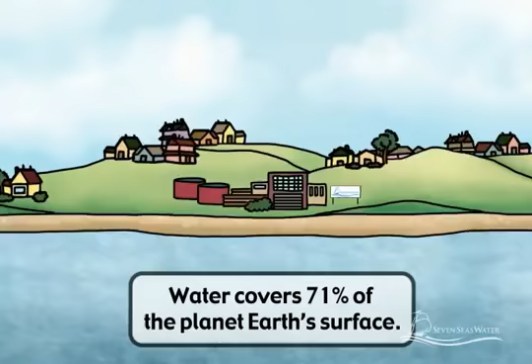As the Earth's population continues to grow and develop, our limited freshwater resources become increasingly scarce. We are fortunate that the Earth's oceans offer an alternative and can provide a sustainable supply of potable water. Seawater can be economically and reliably converted to potable water through a process known as seawater reverse osmosis.

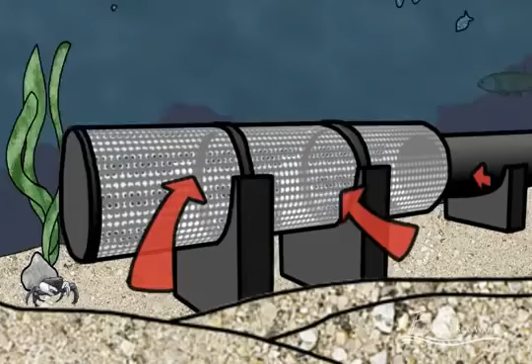The process starts by extracting water from the ocean using wells located on the shoreline or by using an intake structure located in the open ocean.

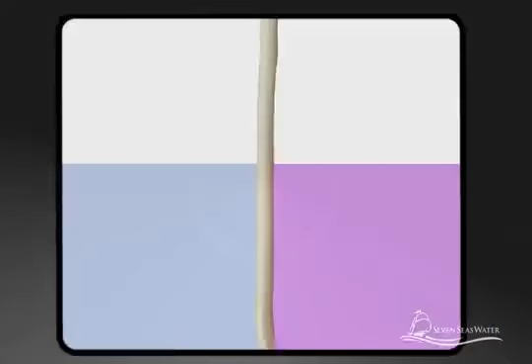Osmosis is a naturally occurring process where a solvent, such as water, passes through a semi-permeable barrier. The membrane allows some things to pass through it, but not others. In nature, the direction of flow through the membrane is from a less concentrated solution, such as fresh water, to a more concentrated solution, such as seawater, until equilibrium is reached.

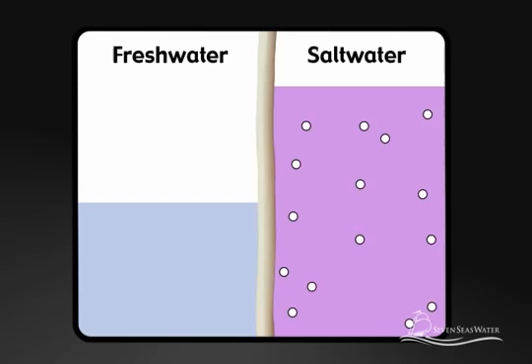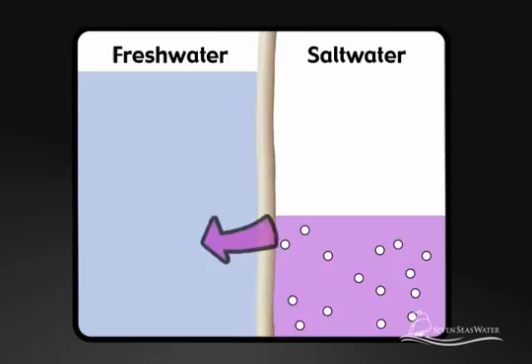Reverse osmosis is when the opposite occurs. By pressurizing the concentrated solution, the seawater, we are able to force water molecules to pass from the salty seawater solution through the membrane to the fresh water.

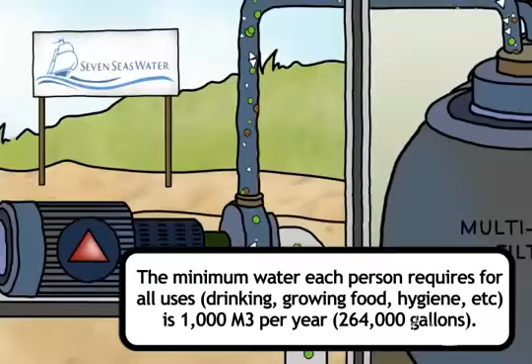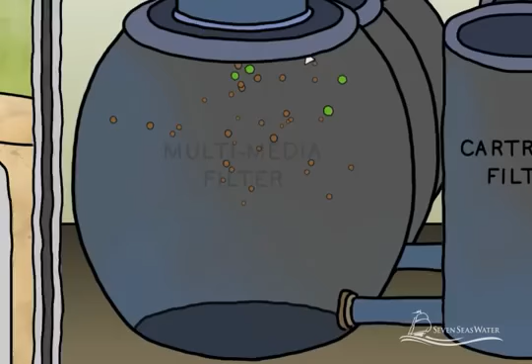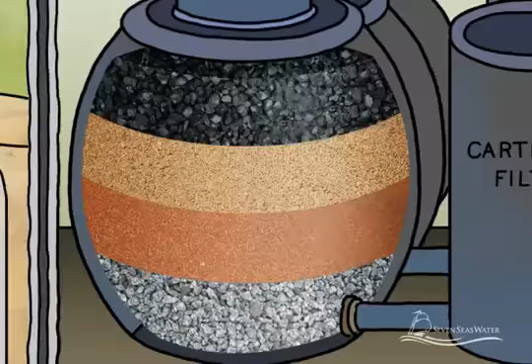To protect the reverse osmosis membranes from becoming clogged by solid particles that can be suspended in the seawater, it is filtered before passing through the membranes. This is accomplished by using multimedia filters, which are tanks or vessels containing a series of layered granular materials. These materials can be anthracite, garnet, sand, pebbles, and/or gravel, assembled in layers. The filters remove sand, twigs, seaweed, and other particles from the seawater.

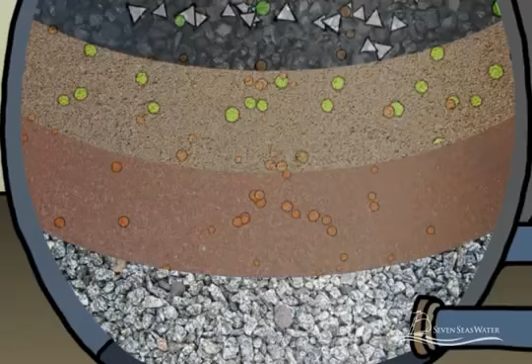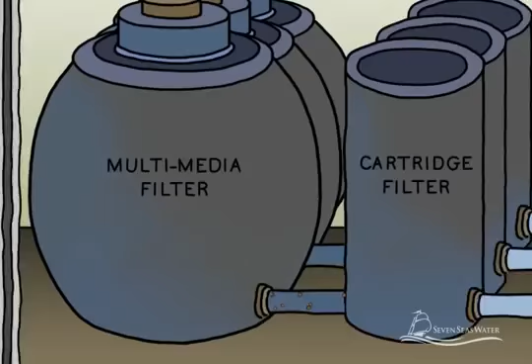In some cases, other types of membranes, known as ultrafiltration and microfiltration membranes, are used instead of multimedia filters to pre-treat the seawater. Next, the filtered seawater travels to the cartridge filters, which act as a second stage of filtration.

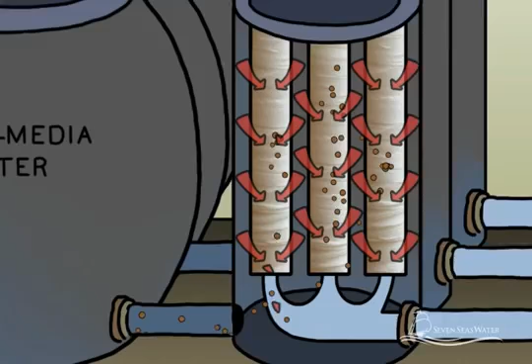Cartridge filters used for seawater reverse osmosis are typically made from a yarn-like synthetic material that is wound into cartridges. These remove even smaller solid particles from the seawater, such as fine sand and clay, before the seawater proceeds to the reverse osmosis membranes.

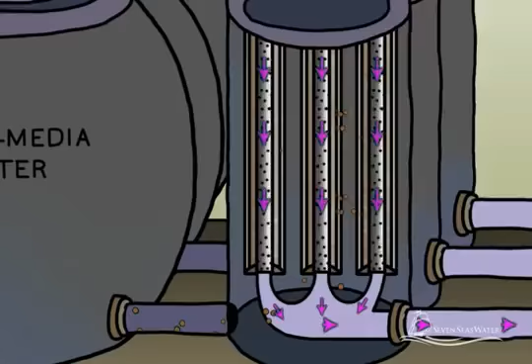High-pressure pumps increase the pressure of the seawater up to 1,000 psi. The pressure needs to be sufficiently high to overcome the naturally occurring osmotic pressure and force water from the saltwater side through the reverse osmosis membranes to the freshwater side.

The salt particles in the seawater are rejected from passing through the membrane to the freshwater side and remain behind on the concentrated saltwater side.

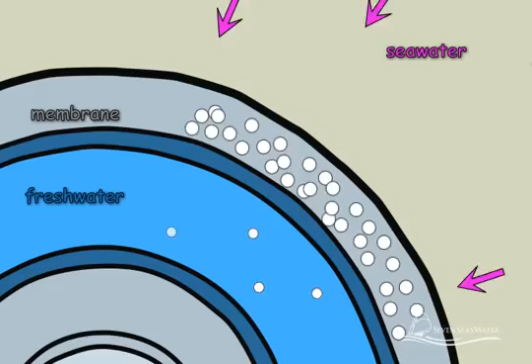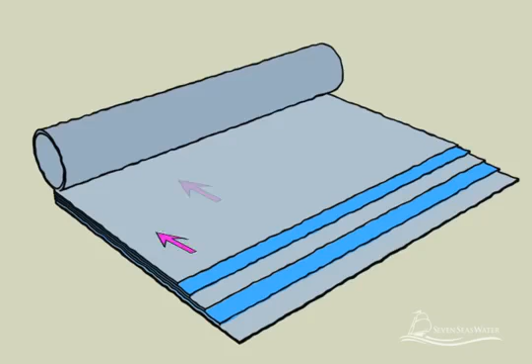The reverse osmosis membrane can be thought of as a number of sealed envelopes connected at their open ends to a tube. There are spacers between each envelope which allow water to flow across the membranes. The membrane envelopes and spacers are then wound around the tube like a roll of paper towels.

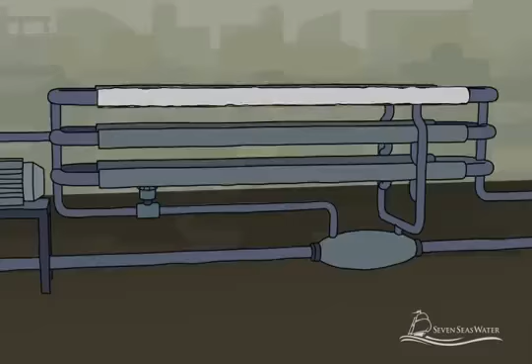The reverse osmosis membranes are then enclosed in a fiberglass shell. The membranes are connected end to end, usually 6 to 7 membranes together, and housed in vessels that are built to withstand pressures up to 1,200 psi.

As the pressurized seawater enters the pressure vessel and flows across the membrane surface, the water molecules are forced into and through the membrane envelopes, leaving the salt molecules behind.

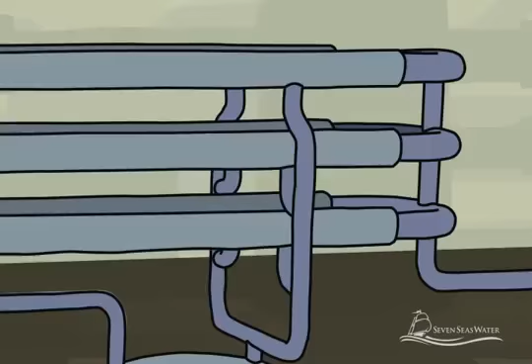The desalted water passes through the membrane and emerges at low pressure, where it is collected in a tube and directed to one end of the pressure vessel.

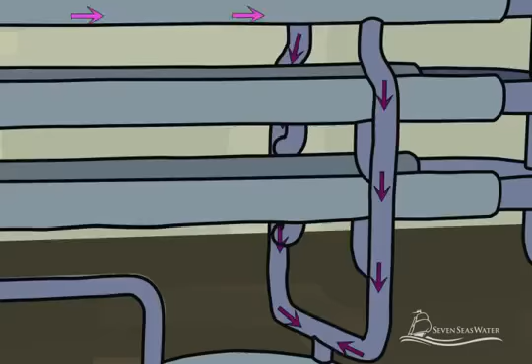The concentrated salt stream that is rejected from flowing through the membrane continues to pass across the membrane surface, where it is collected separately. The concentrated salt stream retains about 60% of the total energy of the seawater stream that was originally fed to the membranes.

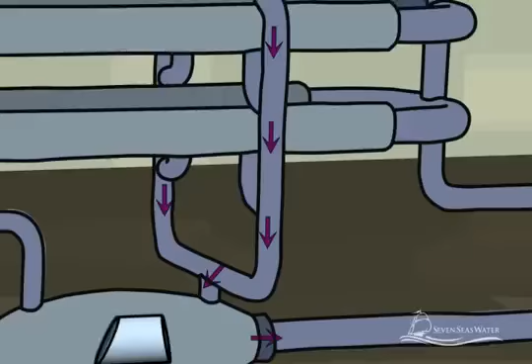To reduce the energy required to operate the reverse osmosis plant, the pressurized concentrated stream is piped into an energy recovery device.

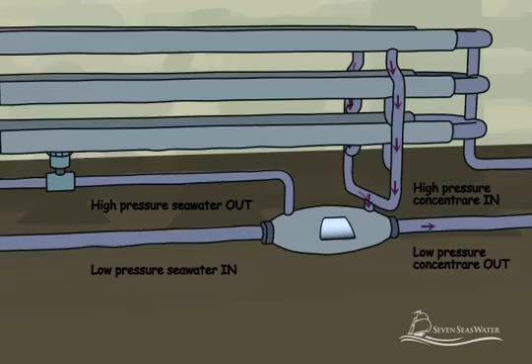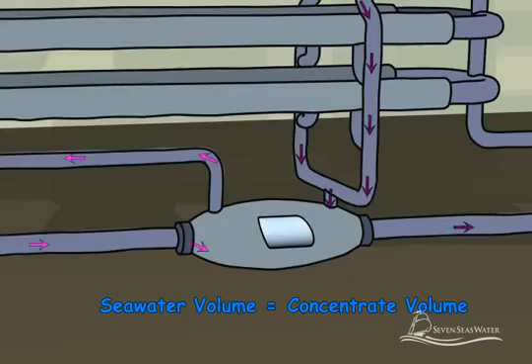Here, up to 98% of the energy of the concentrated salt stream is transferred to an equal volume of the incoming seawater in an isobaric energy recovery device.

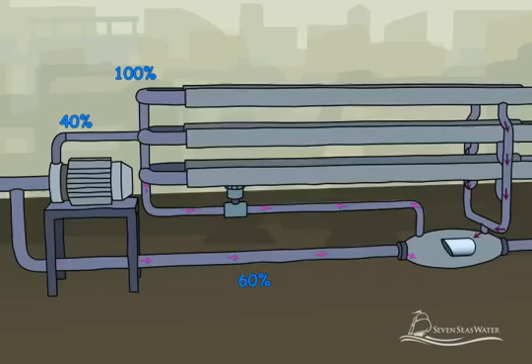The energy recovery device significantly reduces the plant's operating costs by recovering the concentrated salt stream energy and using it to pressurize 60% of the seawater that is fed to the membranes.

The concentrated salt stream will have about a 60% higher salinity than the incoming seawater.

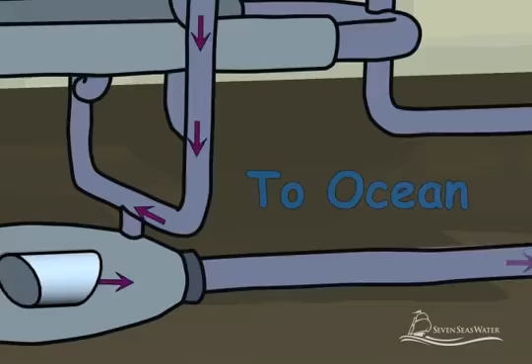The concentrated salt stream is sent back to the ocean through a brine disposal well, or a device known as a brine outfall. The brine outfall is situated in an area of significant ocean flow so that the salt levels are quickly returned to equilibrium with the ocean.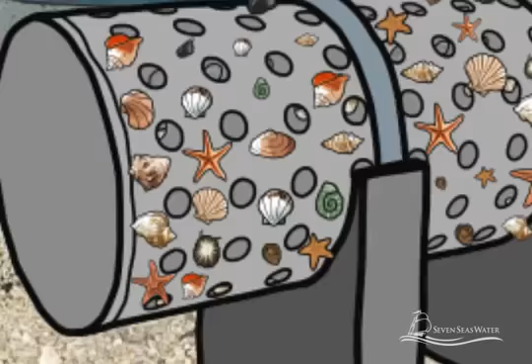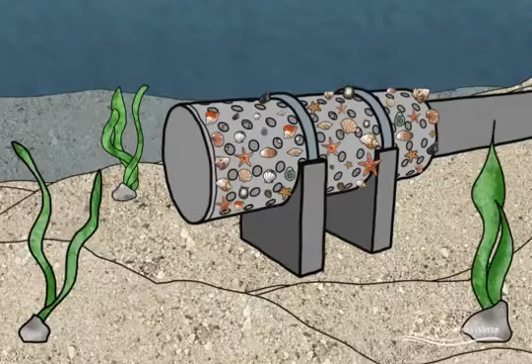The location for the outfall should contain no sensitive marine ecosystems. In a properly designed brine outfall, no noticeable increase in salinity can be detected at a distance of a few meters from the discharge. The pressurized seawater leaving the energy recovery device has its pressure boosted by a small booster pump so that it is at the same pressure as the seawater leaving the high-pressure pump.

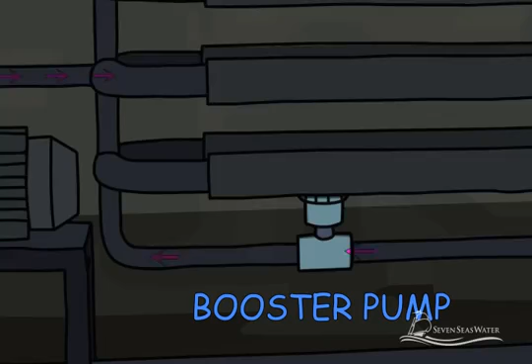The boost is necessary as some pressure has been lost as the stream travels through the reverse osmosis system.

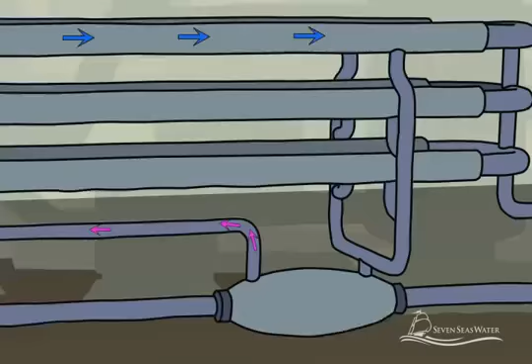Approximately 40% of the seawater that enters the system is converted to potable water during the reverse osmosis process.

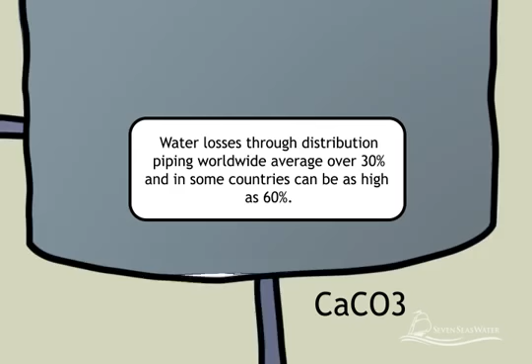The potable water is further treated by adding calcium carbonate to improve the taste and bring the pH to the neutral range. Chlorine is also injected to provide disinfection properties as the water travels from the reverse osmosis plant through the distribution pipes to homes and businesses.

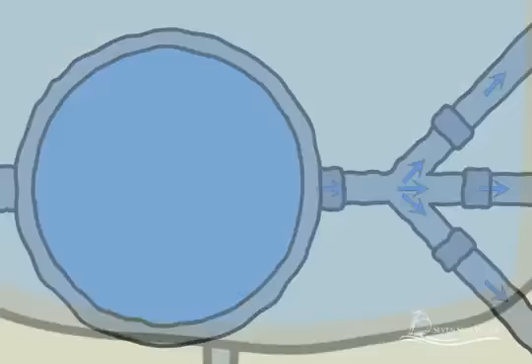When proper conservation of natural water resources is practiced, water reuse has been applied, and a water deficit still remains, seawater reverse osmosis can offer a sustainable alternative. With good stewardship, it can provide life-sustaining water for coastal communities. Desalted water supplies, which are not susceptible to drought and other natural disasters, can provide a clean, safe potable water supply.